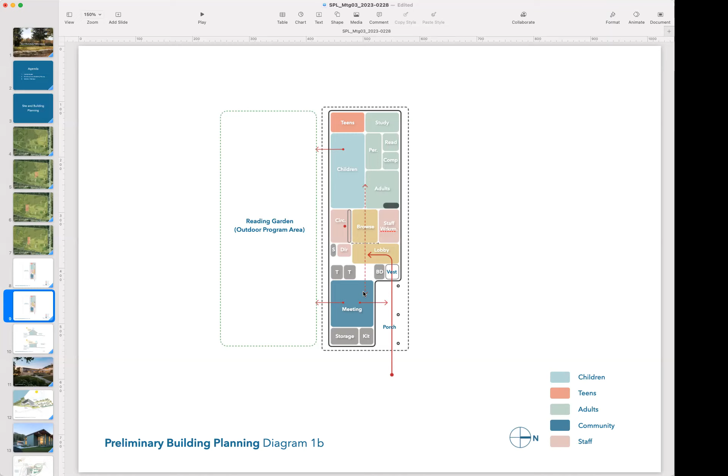So you have a clear sight line from the main reading room straight down through browsing and the lobby and into the meeting room. They're not right next to each other, but if you're here, you can clearly see down the length of that access into that room and see that it's available. But that comes with, in this case, a split between circulation and the staff workroom.

So that's a question for you, Marianne, and Lauren too, about how important it is to have the staff workroom directly behind the circ desk. That is traditionally the relationship we see, but we've seen examples where they're decoupled a bit, and this is such a small building that we thought it might be able to support that approach. The advantage is that it strengthens that visual connection and the circulation from one end of the library to the other, from collection space into that meeting/reading room.

Go ahead, Marianne. So Matt, I have one question—how much space is there? What's the distance from the meeting room to that white space? So there's the two bathrooms, right? How big is that space? Well, the bathrooms are about 7 by 8, roughly 7.5 by 8. So this is maybe 8 by 10—about the same size as the vestibule.

I mention it because it has some of the same benefits I'm talking about in the other section. Another similar project is the Norwell Library, more recently completed. This was completely surrounded by wetland. This is a new 20,000 square foot building. This blue line here is the 100-foot buffer, the green line is the edge of the resource - so these are the various 50, 75, and 100-foot setbacks.

We were able to get most of the building out of the buffer entirely, but there were a couple of incursions into that 100 to 75 foot range. That was mitigated in other ways - we increased the amount of wetland area, landscaped areas that compensated for the disturbed areas in the buffers.

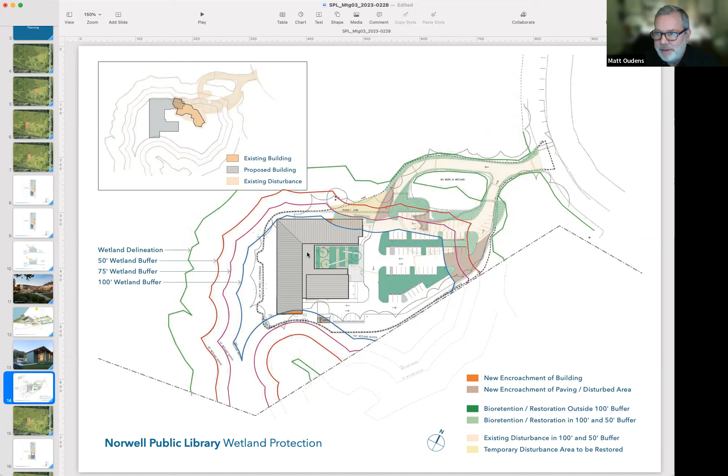A similar approach - a single slope roof sloping down into a center, in this case a center courtyard, that also acted as a kind of rainwater collection, retention, and infiltration area. This building had wetland all around it, and it was really trying to keep everything in the middle. The Eastham Library was more of an edge condition.

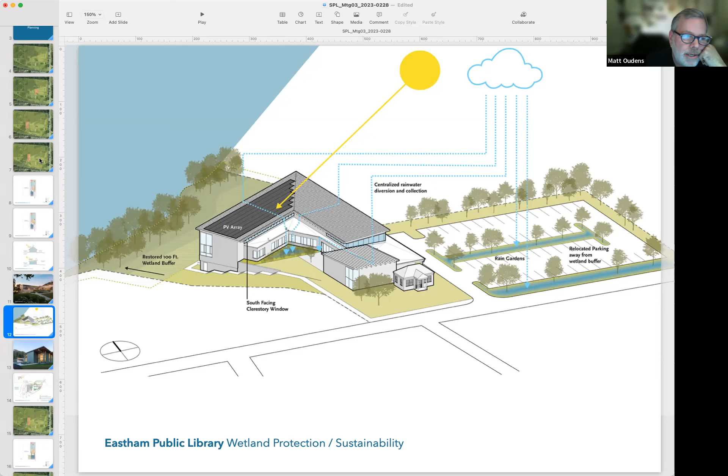Those kinds of strategies are what we're talking about when we're looking at a building oriented like this, and we're thinking it'd be nice to get all the water off that roof and back into the area outside the buffer, ideally. That's kind of the starting point for where we're thinking. It doesn't mean that's the only solution, but that's kind of how we think.

Moving on to another, this is a slight variation of the previous diagram that you saw.

Can I just ask, can you hear me now? Oh yes, yes, now we can. Yes. Okay.

Actually, my original comment is much less relevant now, and it's something we can talk about in future meetings. It's not that important.

But one thing I do want to mention, since we're talking about sustainability strategies right now, is that our understanding from the Green Communities Division is that you need to get the Green Communities Division and your utilities involved in the design very early, like now, in order to qualify for the biggest incentives. The new revised stretch code is going into effect this July, and so it will impact this project, and you want to get into the most advantageous pathway for the greatest incentive. So I just wanted to mention that.

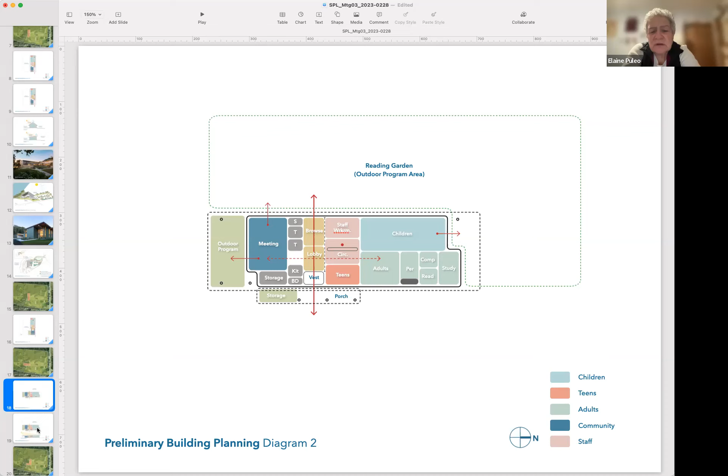But it really cuts down on our solar capacity, doesn't it? Well, it doesn't necessarily. So we thought about that.

We initially, when we were thinking about this scheme, thought a gable roof oriented north-south with one half facing west, one half facing east, came out of a conversation with our solar consultant, unlike in the earlier iteration you saw where the building was oriented with one side of the roof south and one side north. Only in that case, only the south side is going to really do much for you.

Our solar consultant said that in this orientation, the west side and the east side would both capture and yield. It wouldn't be as efficient as a roof facing south, but you would still get the potential to use solar on both sides, just a lower percentage of energy.

So we thought, okay, what if we took the same approach we thought about in the other scheme, but in this case we ran it the length of the building. So we're sloping from low at the outdoor program area up to high in the reading room. Hierarchically, in terms of the spaces, that also makes sense, moving from lower space up to the higher spaces. So the biggest room is the tallest room in effect.

We would have mechanical spaces above things like the circ desk, the staff workroom, and the bathrooms. But the lobby could be open to structure above, the main reading room could be open to structure above, and the meeting room could be open to structure above. And then that same structural system extends out and creates this covered outdoor space, same structural logic.

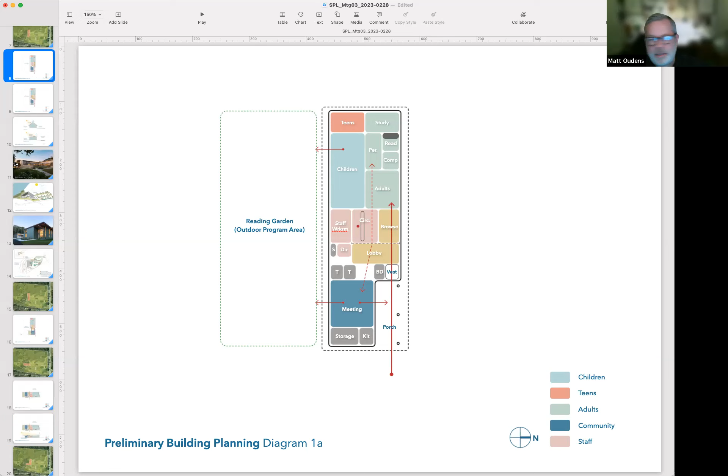So in that case, then that entire roof is south-facing PV. So in terms of the real estate, it's the same as this option when it was south-facing. There's really no difference in the solar potential there.

So then it's really a question of what do we think about this orientation as it relates to the site. And I think that's something we're still studying. We're not at a point where we're ready to make any kind of conclusions or recommendations, and frankly we're not looking for you to make any decisions about anything tonight. We're just giving you an update on our thinking and progress, and hoping to get some feedback from you to help narrow our focus a little bit.

So Lauren, you have a question? Wait a minute, Lauren has a question.

I do want to say that I really do prefer the staff workroom adjacent to the circulation area. I think it can work the other way, though. I've worked in a library where it was not connected, and there are workarounds, but it's not ideal.

But this made me think, what would be the advantages and disadvantages of a sawtooth roof in this orientation? You could have maybe 3. I just think that in that adult area, that's going to be a really tall space, and you're going to have to work hard to condition that space with such a high ceiling in there with this configuration.

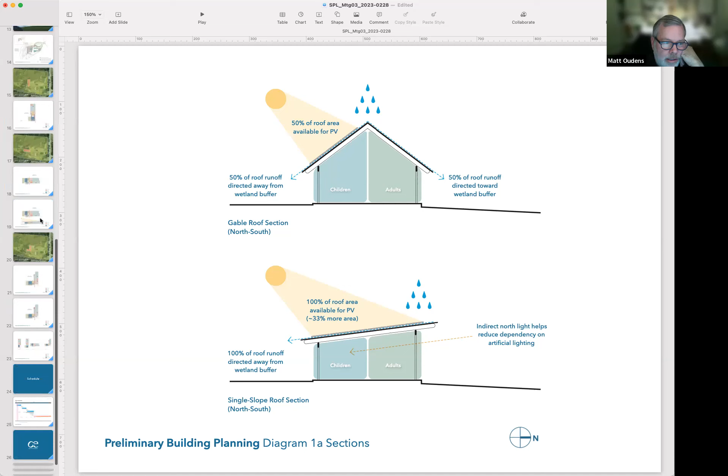One other thing about a roof that is sloping away from the road: if we go back to this earlier diagram and think about roof material, in the gable roof, half of that roof is visible to Leverett Road. In this case, none of the roof is visible from Leverett Road, and the same is true in this version. So the material of that roof is not important. In the gable roof, if you said we're going to save money and do a TPO roof on this entire building, it would look terrible from Leverett Road.

But on a building section like this one, or the other one that's entirely south facing, you could do a TPO roof, cover it entirely with photovoltaic, save money on roofing costs, and really never see it, even when you're on the south side of the building, because the pitch of the roof is so shallow. In fact, the Norwell roof is a TPO roof, and it's such a shallow pitch that you really can't see it even from the parking lot. You barely get a glimpse of the surface of the roof. So just something to mention.

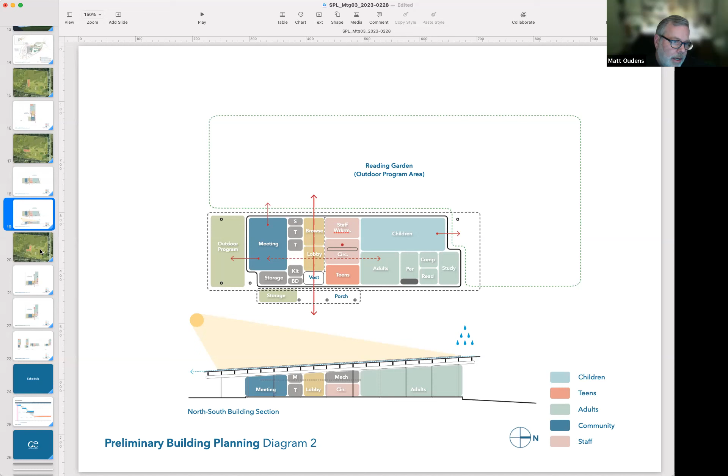We have one last diagram, and that is, we thought, okay, what if we bent this bar, which did a couple of things for us. One, by virtue of having an L-shaped building, it starts to define outdoor space. And so you can imagine that the 2 wings of this building are sort of arms cradling this kind of outdoor activity space. And in this case, we pushed the septic further away so that there's space between the septic and the building, and there's a kind of smaller scaled outdoor precinct behind the library, which is very different in character potentially from what's on the Leverett Road side of the building, which is more expansive, open meadow.

The backside of the library is pushing up against the trees, and so you can imagine a very different character of landscape front and back, and that's true in some of the other diagrams as well.

But the other thing that the L does for us, we thought, is that it provides a little bit of separation between parking, however that ends up getting resolved, and that outdoor space. I think that the previous diagram does that also. If we think that outdoor space is going to be on the west side of the building, the parking is on the east side, the building is creating a buffer.

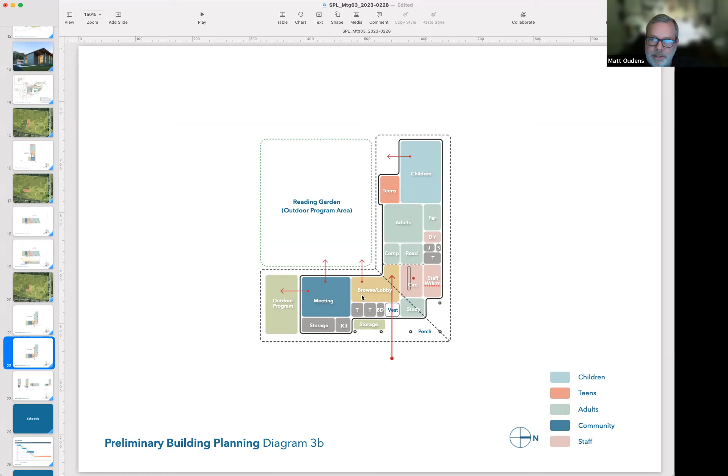So just for comparison, these are all roughly the same size. As we get into drawing these in CAD, and drawing wall thicknesses, furniture, and shelving, we'll get more specific about square footages. We don't have a square foot analysis yet, but these are all in the range we expected.

We think that with the grossing factor accounting for walls and some currently unidentified support spaces I mentioned—electrical, water service, and pump room—these are all probably going to be in the 5,500 square foot range. Maybe we can be a little more efficient.

They're pretty efficient buildings in that there isn't a lot of circulation. It's a lot of open spaces next to other open spaces, with some small rooms, but not much in the way of corridors or typical circulation you'd see in other buildings. That's a good thing—it means we can be more efficient in our net to gross ratios.

Brad has his hand up. Brad: I like that last one, but I also wondered, just because it's angled, does it have a higher cost? It might. I don't know off the top of my head.

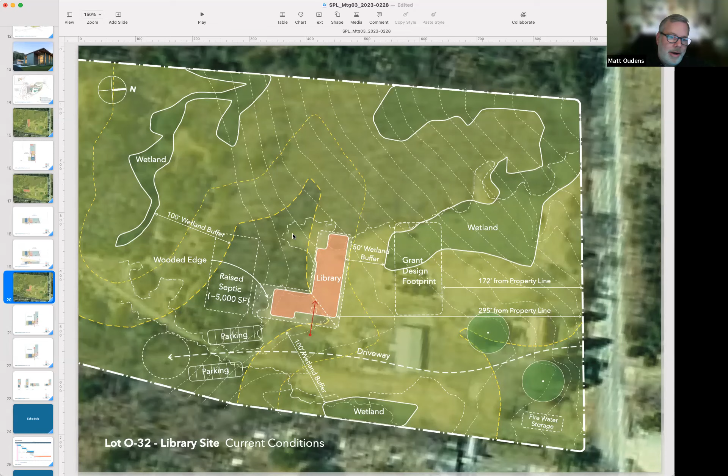Am I also right that was more in the buffer? It is, and the reason it was is we were trying to figure out a way—could we get septic and the library to sort of share their imposition into that first 50 feet of buffer.

And again, please do not take these as proposals—this is us just kind of thinking on paper. And in fact, I meant to mention earlier, and I didn't, but I will now: this corner of the site, which you can see, is outside of the buffer, and that's where the current looped entry drive is.

One possibility is that we use that location for the firewater storage tank, which is a below-grade tank, something in the neighborhood of 20,000 gallons—15,000 or 20,000 gallons, we'll have to do that calculation. But that would be easy to access for filling it. It's outside the buffer, and you would just pipe it to the building.

But another possibility is that we look at the septic field in this location, and see if there's a way to get it to nestle into that corner between the tree and the property lines. We'll have to look at what the setback requirements are there, but that would put it downslope from the library, which is good.

We'd have gravity working for us instead of the potential to have to pump as much, pumping uphill. So I think there's a potential advantage there. And it gets it close to the road and away from the wetlands, instead of right in the middle of this property.

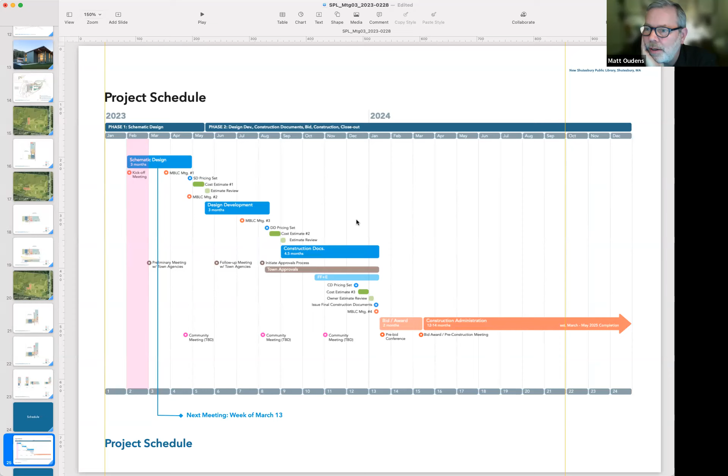No, I don't know about that area. Can you describe where that is on the site roughly? Yeah, sure. Can you pull up a site plan?

So why don't you show me one of these. Yeah, that's a good example. You see that wetland just south of the relocated building, along the east side of the property? It's actually on the west side, just south of your orange rectangle, that long linear wetland area. If you think of that as a hand, the thumb, there's kind of a stub, a flat line. That line has fill that the commission has determined is unpermitted fill.

It's several feet thick, and the wetland scientists were unable to close that line without heavy machinery. So by consensus with the applicant, we've agreed to approve the other wetland delineations, but that line between the two points hasn't been delineated. So it could be that's approximately where the end of that wetland is, or it could extend 50 feet.

We just don't know. If it did extend, that could change your buffer line. That would need to be determined if there was going to be any work activity requiring it. Our understanding was that there would be a notice of intent, and if that was an issue, it would get resolved at that stage.

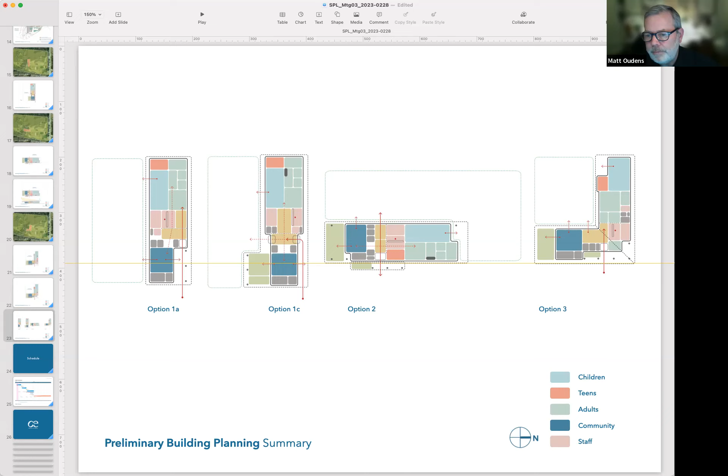Yes, I can share a PDF, I don't know the best way to do this, with Elaine and Marianne. Should I just email the two of you and let you distribute as appropriate? You could, PDF definitely. Matt, can you just copy me on it as well? Of course. Thank you, and we will get in the habit of doing that after every meeting so you have a record of the presentations. Thank you very much. Thank you for doing that, Penny.

Okay, Lot O-32, Mary Ann, what are we doing?

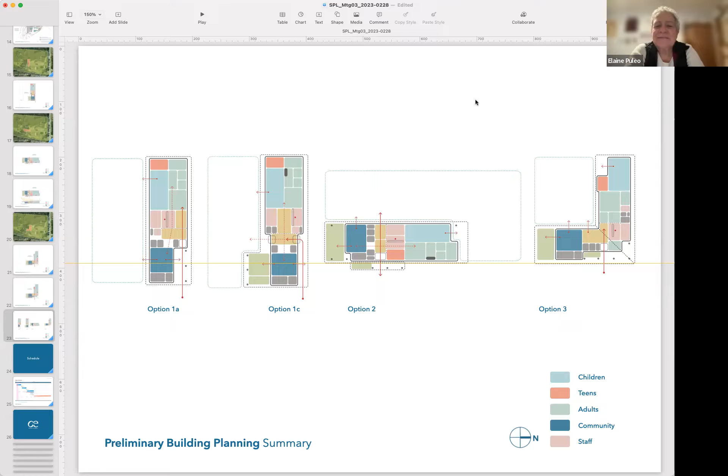Well, before that, Matt and Neil have both brought up with me making a plan for meetings going forward as we get more into the nitty-gritty of the design. It really seems like the next meeting should be an evening meeting, with Conservation, Board of Health, and Select Board, like you said, in 2 weeks. But Matt asked if there was a way we could have a design subcommittee that would meet during the day. Matt, is that still something you're interested in?

Yeah, for two reasons. One, daytime meetings are easier for us. It also means it's more likely we could have a number of those in person, whereas evening meetings in person are a challenge for a 7 o'clock meeting in Shutesbury. But also, these are big groups, and it's a lot to meet regularly with a big group. In the past, we've found it streamlines things to meet with a small core group to talk about the specifics of design, and then report on a monthly basis, or whatever's appropriate, to the full committee and get their feedback. It's worked well for us on other projects, so we thought it might be a good option here. Doing it that way, the subcommittee could report back to the full committee, and we'd still have our biweekly meetings as the full committee, and then you could come to a monthly meeting.